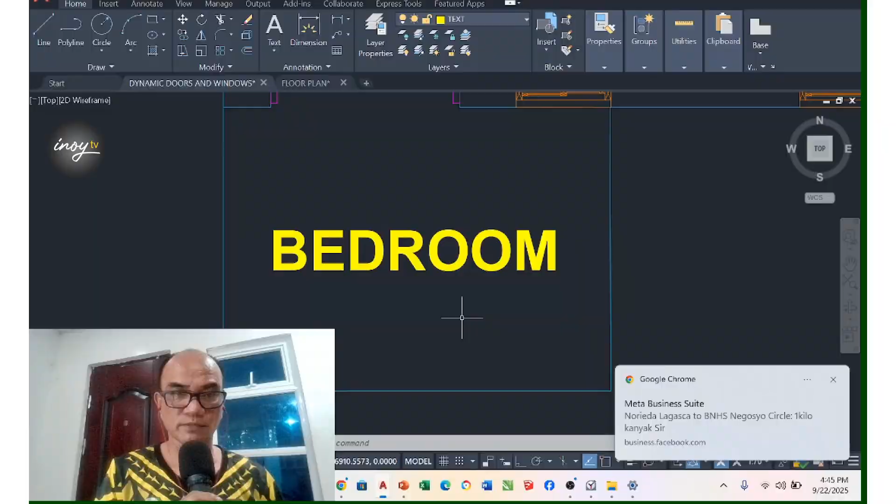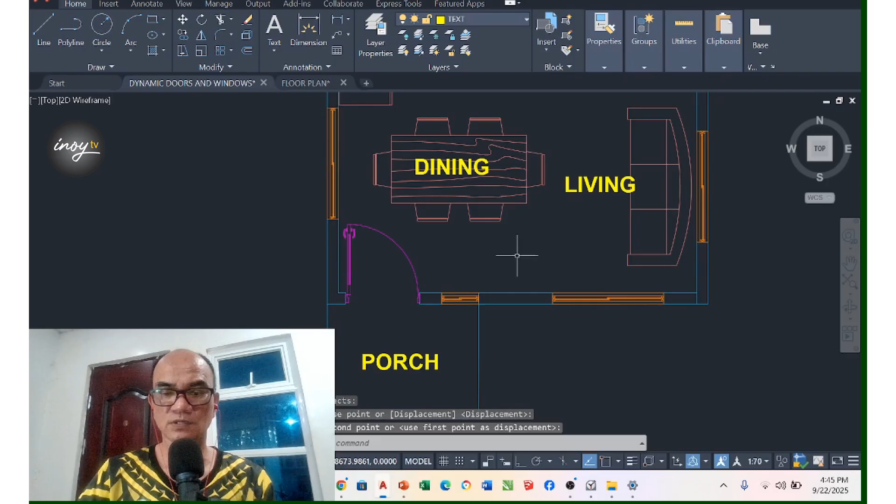So, we have our porch ulit. Double click lang natin yan. So, porch. Then, after that, you have to arrange nyo na lang yan. Okay. Bibigyan ko kayo ng tip. Kagaya ng sinabi ko kanina, kung ano yung binigay mong command, mag-enter ka lang. Enter ka ulit. Pag nakita mong nagbago yung cursor mo, ibig sabihin nag-execute na ng command yon na yung command na binigay mo kanina. Enter ka ulit, then pwede mo nang i-arrange. Ibig sabihin, pag ganyan ang cursor mo, wala ulit.

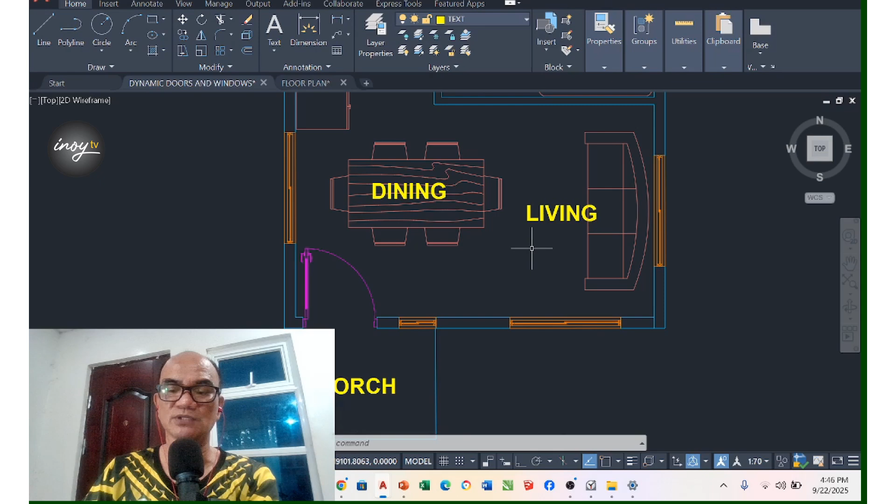Mag-execute ka ulit ng command, enter ka ulit, kasi move din lang. Click mo na yung i-move mo na object. Enter ka ulit, then ayusin mo na yan. Wala ulit. So, enter, then enter ulit, then i-arrange mo na yung okay. So, okay lang yan sa T&B, okay lang yan, balcony, T&B, then okay na yan.

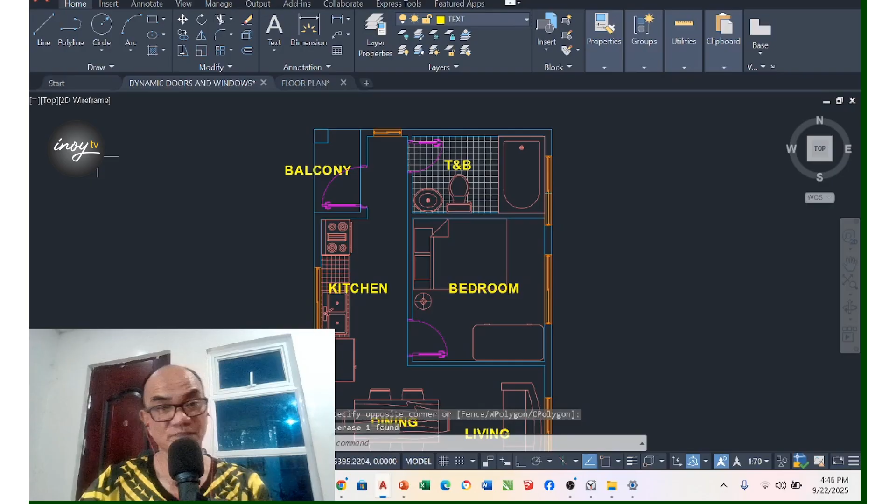So, kapag okay na yan, i-on natin ngayon, double check lang natin. We have balcony, we have T&B, we have the bedroom, living, dining, then we have our porch. Now, para mas madali ang paglagay ng ating

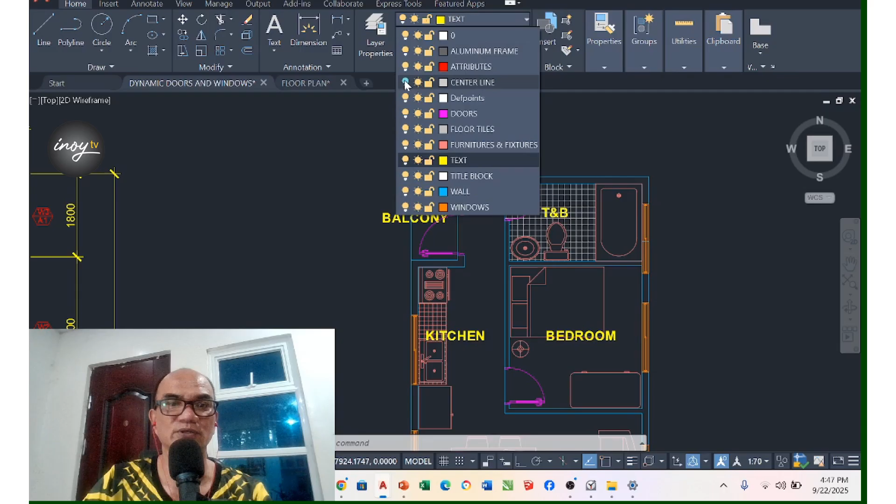dimension, i-on natin yung center natin kanina. Kasi sinabi ko, di ba, center dimensioning tayo. Ibig sabihin, dapat nasa gitna ng mga wall yung dimension natin. That's why hindi natin dinelete yung draft natin kanina na center line. Yun yung gamit ng center line o yung draft natin kanina, mas madali nating makita yung center. Kapag kailangan mo nang maglagay ng dimension, kailangan i-on mo ulit yung layer mo na yon para mas madaling makita.

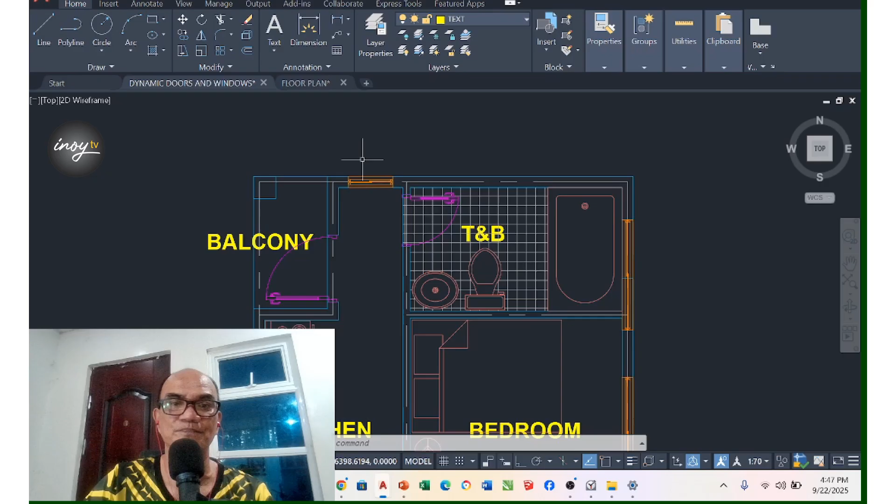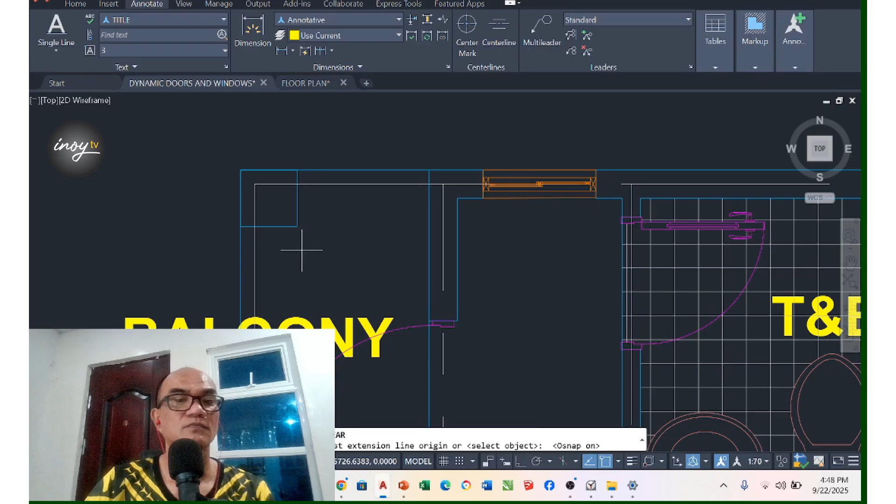Okay, click natin ngayon yung text natin. Then we go to annotate. DLI tayo. DLI. Enter. Click natin dito sa gitna. DLI. Check natin yung object snap. Click natin dito. Then hanggang doon. Okay, ay dito pala. That is 1,000.

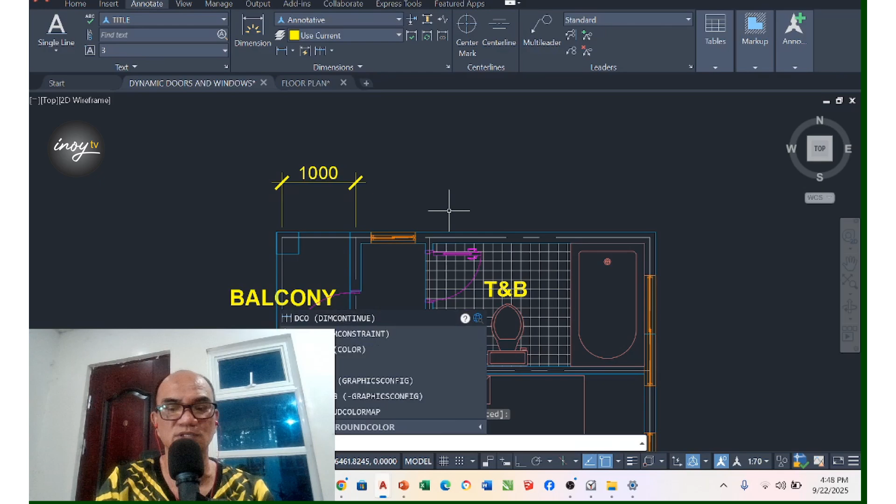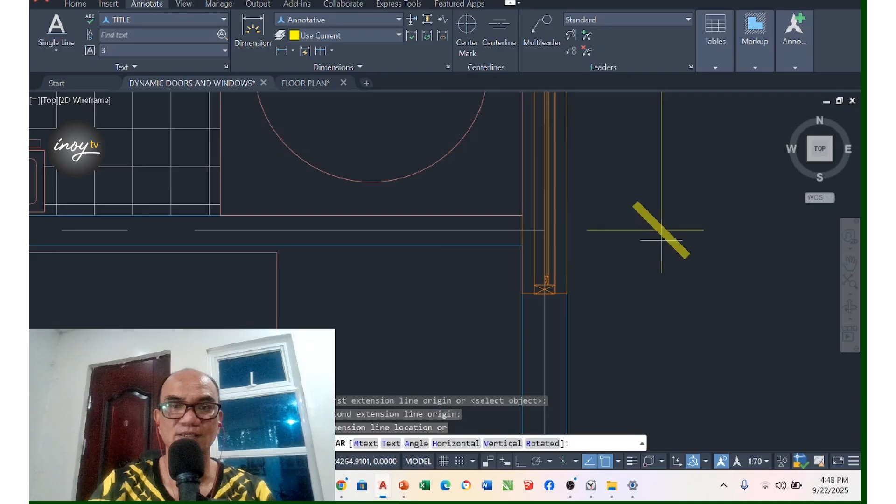Approximately, ang layo ng dimension mo sa wall ay approximately nasa, kahit ganyan okay lang yan, approximately nasa 1.5. Para diretso yan, wag kang mag-escape. DCO ka para continue. Yun ulit. Then click mo ulit doon. Enter, DLI ka ulit. Enter. DLI. Ito, hanggang doon. The same ang layo. Then DCO para continue, para hindi mo na kailangan mag-ano. Then the same dito.

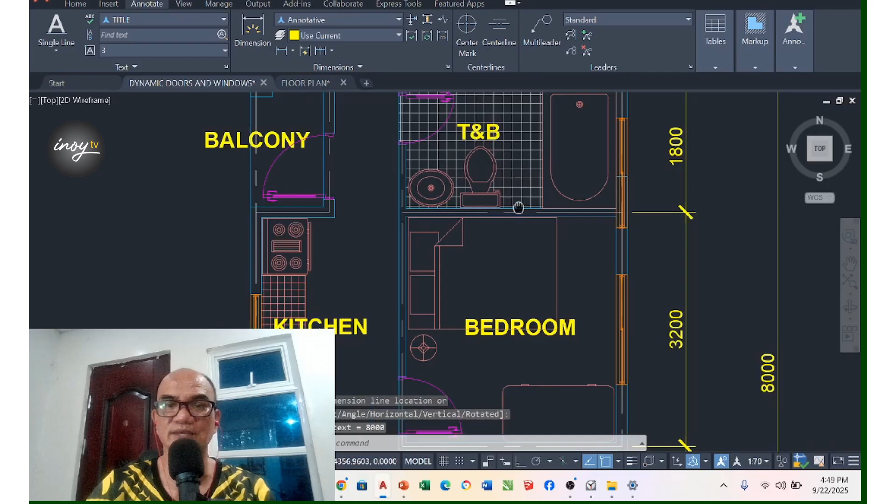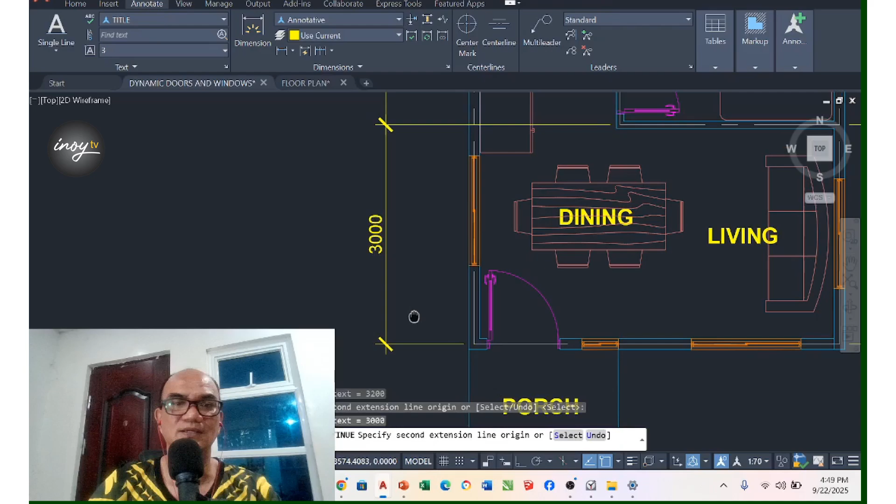Enter, escape. DLI ka para kunin natin yung overall dimension ng part na to. That is 8,000. Dito ulit sa kabila, DLI ka ulit para mas madali. Click mo dyan, then click mo dito. That is 1,800. Click ka, then DCO. Ang kukunin mo ay ito. Then another one, ito. Kahit wag mo nang kunin muna to kasi wala namang ano yan.

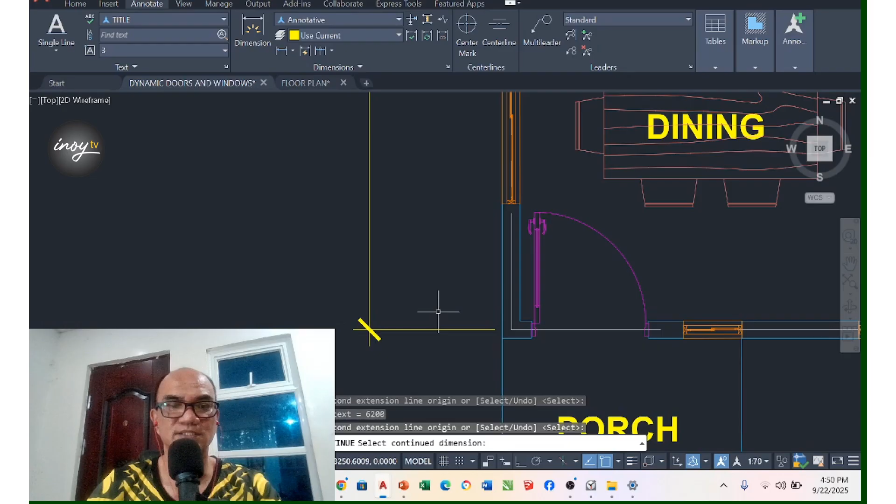Palitan natin, so DLI. Then dito sa kabila, that is one. Then DCO, dito na sa dulo. Enter, escape. So that is our size dimension. Ito na yung overall natin.

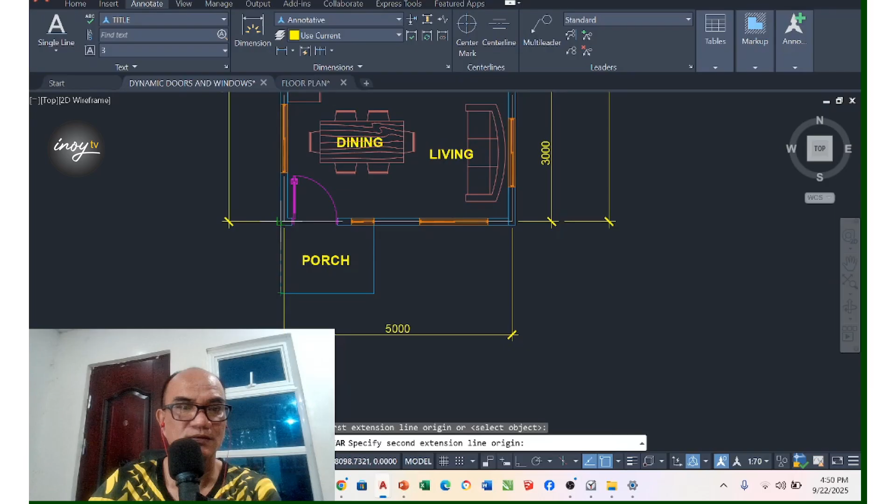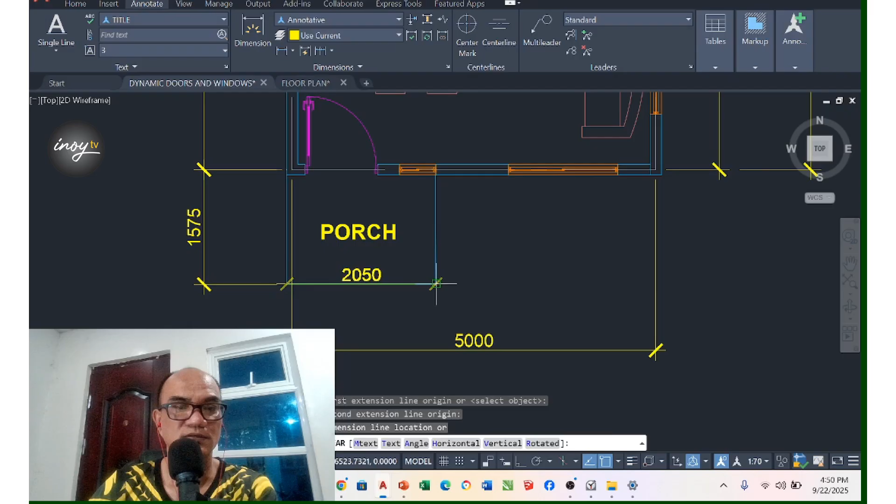Then we have to lagyan natin dito ng DLI ulit. Gitna-gitna. Lagyan na rin natin ng enter, para makita natin yung ano. Supposed to be, that is 1,500 magmula dito, kaya lang nilagay niya yung center dimensioning kaya naging 1,575. It's okay. Then enter ka ulit. Kunin natin dito, that is 2,050. Okay lang yan. So that is our ano.

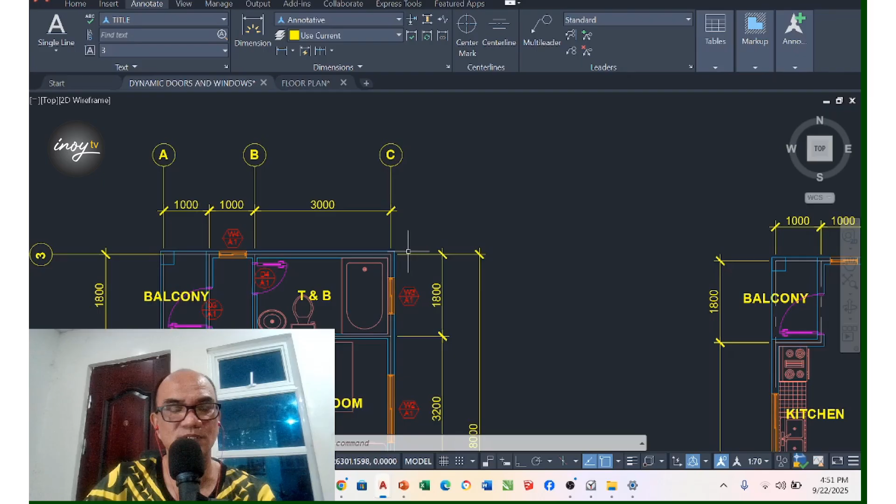Nakikita natin dito yung A, B, C at saka yung 1, 2, 3. Ano ba yung A, B, C na yan? Actually, yung A, B, C na yan, like for example, ito poste, dito may poste dyan, may poste dyan din, o column. So paano natin gawin yan?

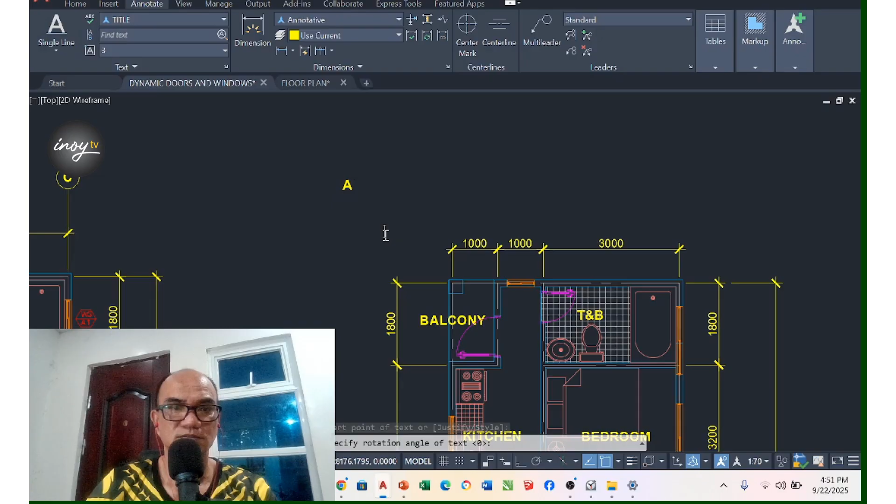Approximately, gawa na lang tayo ng title ulit, single na lang. So we have A. Approximately, gawa ka na lang ng circle. Then move mo. Then another line, gawa ka na lang dito ng line. Ganyan lang, so ilagay mo yan. So copy mo yan.

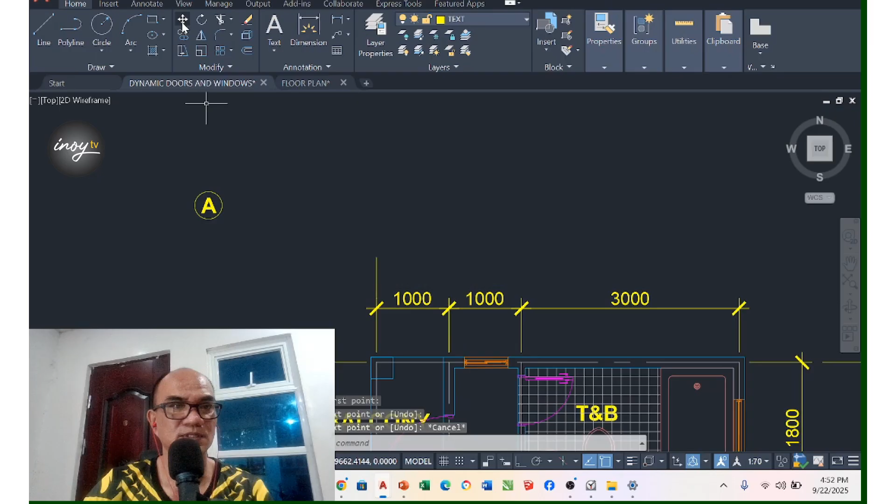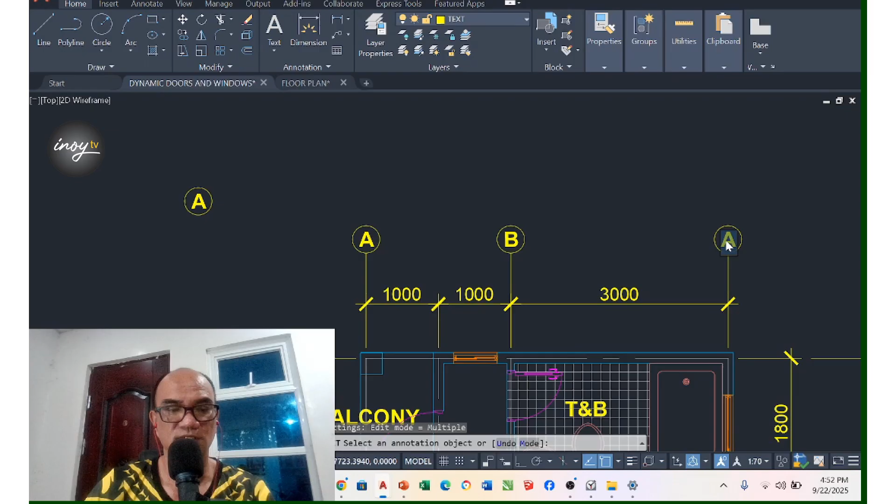Then we have, copy mo na lang ulit yan. Hanggang doon, then this is B. Then we have C. Dito ulit sa kabila, lagyan ulit natin dito ng 1, 2, 3. Kasi poste yan, 1, 2, 3. Supposed to be 4 yan, lagyan pa natin ng isa. Copy na lang natin yan. So this is number 4.

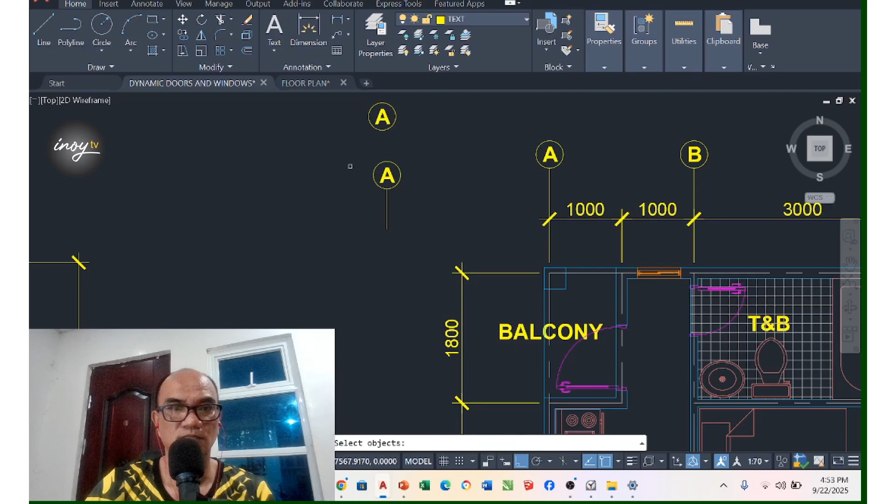So eto, copy mo na lang ito para iisa yung size ng ano. Then rotate natin. Ulitin natin, rotate. Then copy. Dulo.

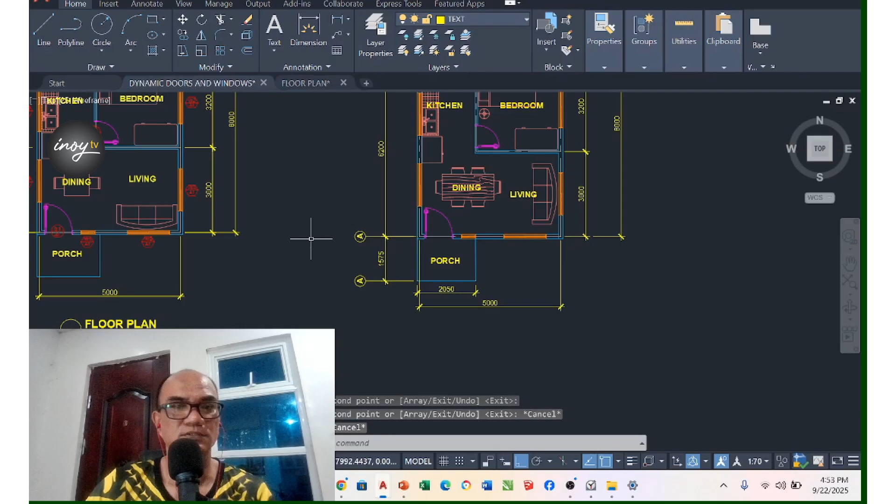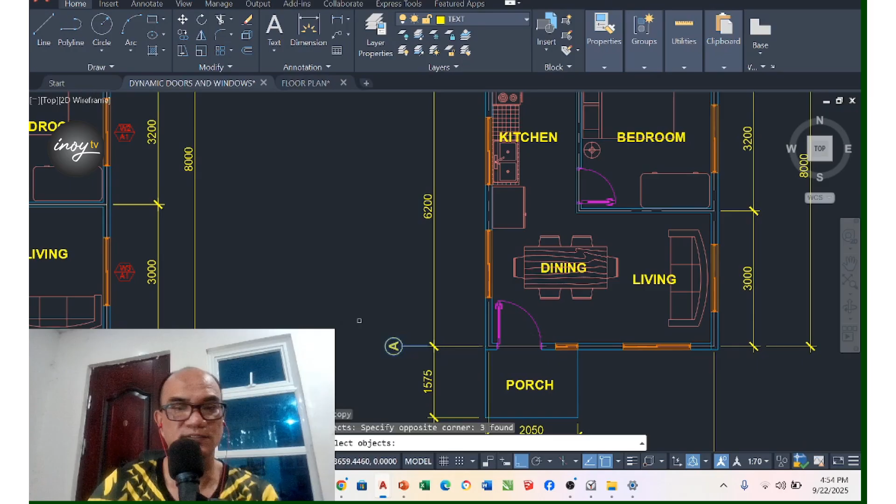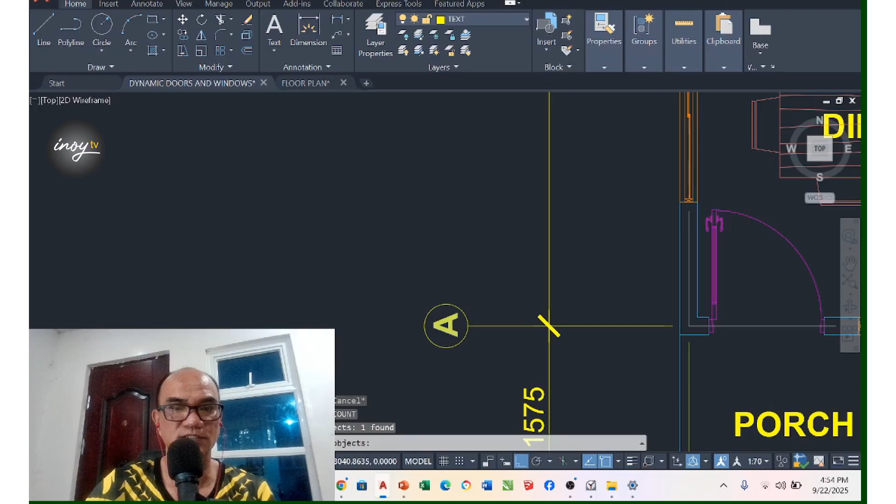Then 1, ang gawin mo na lang dyan, mag-T-count ka na lang. Wala na to, so T-count. Select mo to. Then another one here. Merong kulang, supposed to be meron pa isa dito. So copy natin. That's it, ulitin na natin yon. Then T-count. Enter, select natin yung iti-T-count natin, 2, 3, and 4. Enter, then enter ulit, another enter, then O, overwrite. Okay, so that is 1 to 4.

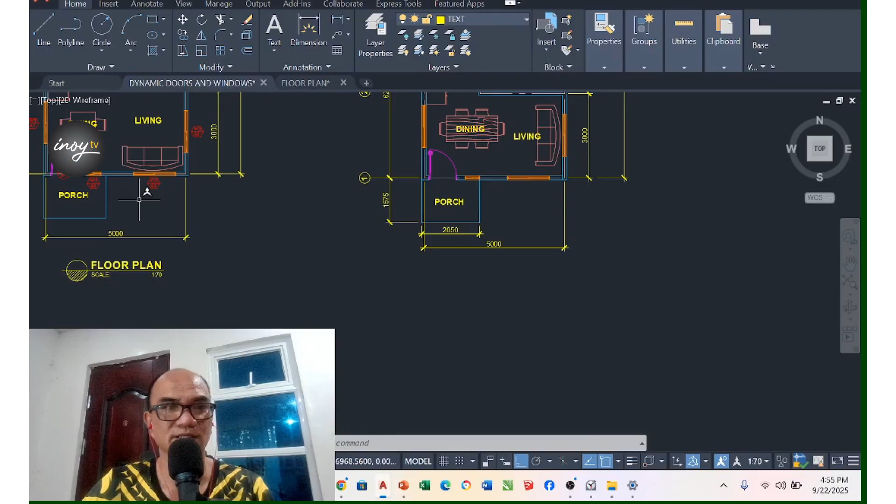Kapag okay na yan, maglalagay ka na ng pangalan na floor plan. Ang gagamitin mo ay title number 2. Ano ba yung title number 2? Tingnan natin yung text style na, that is 4, ang text height. Floor plan. Maglagay tayo ng line

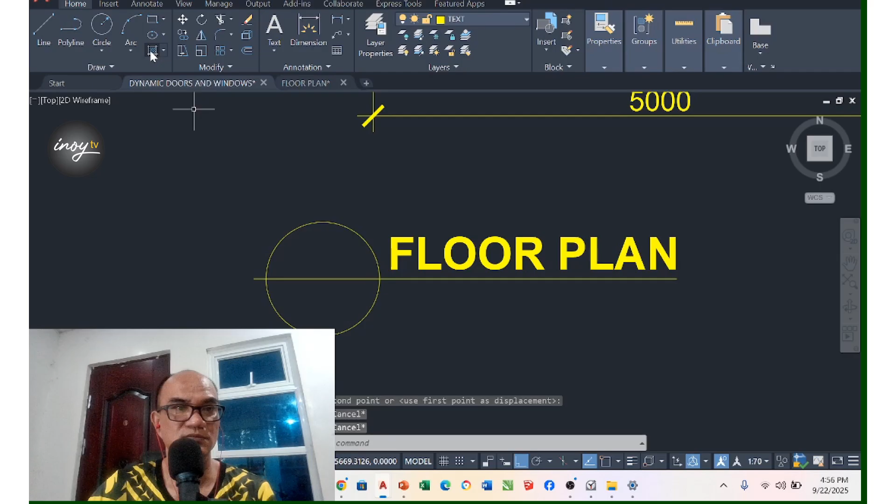dito. Then circle, okay lang, lampas ng konti. Then move natin. Alisin natin yung object snap. Wala namang standard ng paglagay ng ganito, ng kung ano yung circle.

Hatch tayo. ANSI 31, click natin dito. Then this is 0. Natatandaan nyo kanina yung ginawa natin na 2? Meron tayong ginawa dito na scale. Actually yung scale na yan, 2 yung text height niya. Yun yung gagamitin natin dito sa kalagay na scale. Then move na lang natin yan.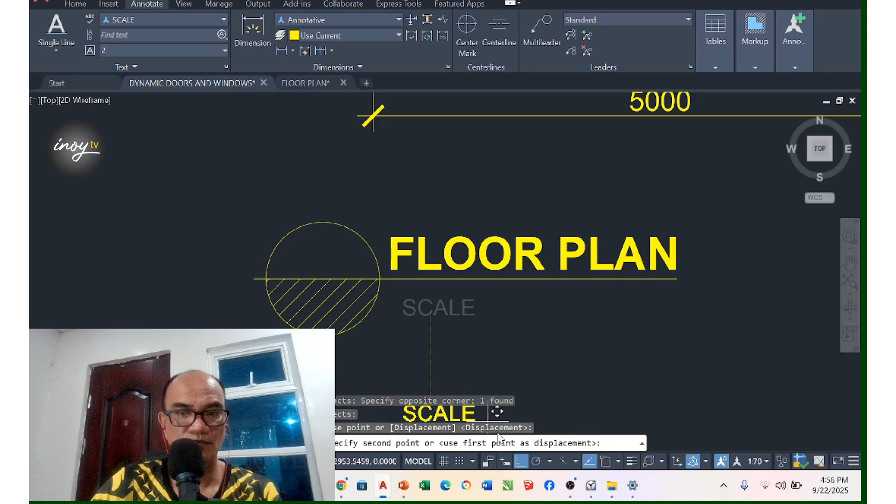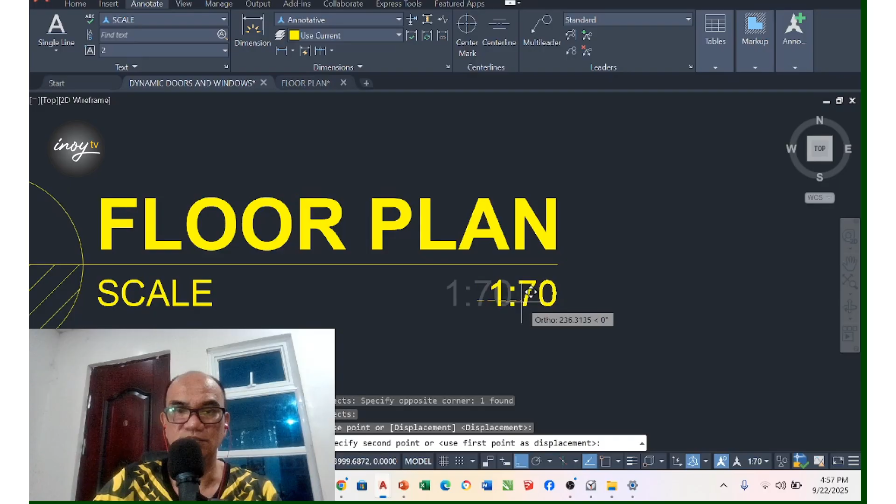So move, i-arrange natin. Alisin natin yung ortho mode. Ortho mode, copy. Then we have our scale, so that is 1:70. Move ulit natin. So move, i-align na lang natin dito. Then move ulit, lagay natin dito sa may gitna. Ganyan, okay na.

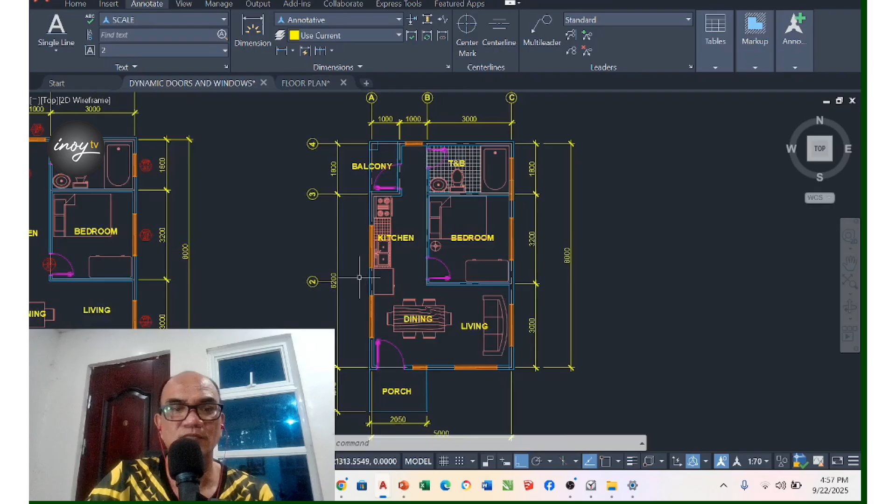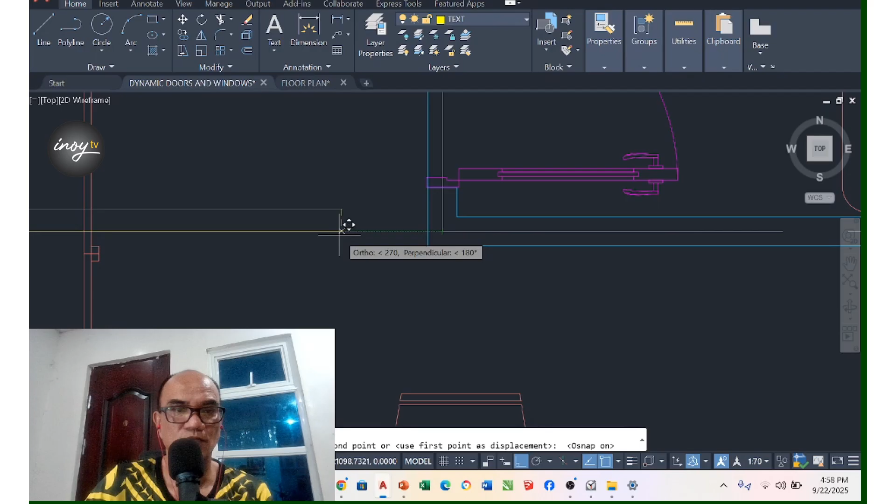Ito kasi, ganyan, pwedeng nakalagay dyan. Katapat nito, so itapat natin. Ito, katapat dyan. Ito yung katapat niya kasi may poste dyan, may poste rin dito. Yan yung katapat, yan yung ating floor plan.